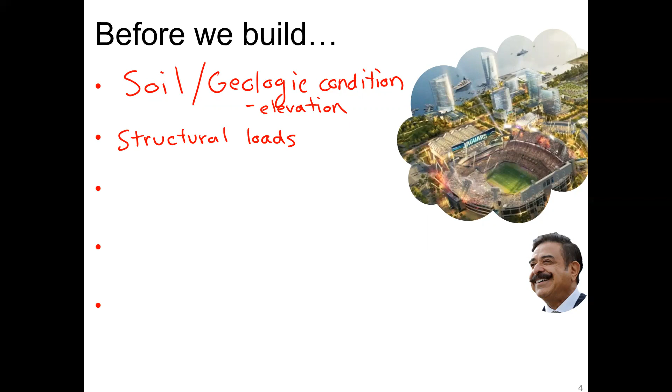Yeah, that's kind of cheating because that's geotech stuff, but yeah, soil and geologic conditions are definitely important. But what else? Elevation—yeah, that's kind of related to geologic conditions, but especially in Florida where we have groundwater table issues and flooding, you need to check the FEMA maps and everything. But also, like our structural engineering friends—structural loads are important. We need to know what type of structure it is and how these external loads are going to be applied and eventually transmitted into the soil or whatever foundation we have.

The serviceability is important too—what exactly is the structure used for? As you guys may have already seen in some of your workplaces, depending on the type of structure, there's a dependency on the amount of money you pour into it as far as design considerations go. If you're designing a nuclear power plant, something meant to be there for a long time producing a lot of energy for society, you usually put much more design effort into it than you would for a warehouse or storage unit. So the serviceability of the structure is an important aspect. Other things, like existing utilities, matter too.

As we were talking about in the CE materials class, something else you would consider is the available contractors and available materials around, the availability of materials or contractors.

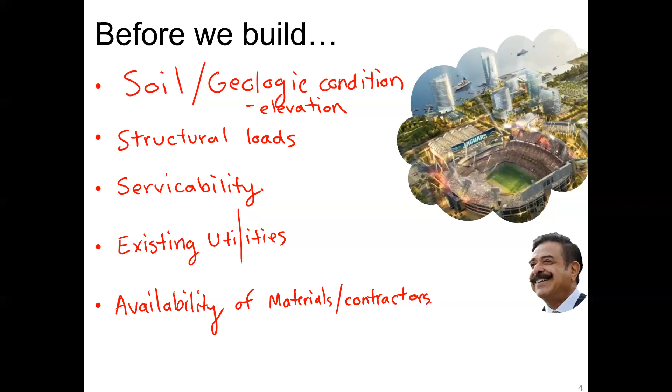I was talking to a former student who's working right now doing a new geotech ground improvement technique. When the contractor mentioned this, I'd never seen anyone do this in Florida. He said the contractor drives 15 hours from South Texas just because we don't have the availability of contractors in this area. That's hard to replicate in the classroom, but when you start working, you'll have to take into account the availability of skills of nearby contractors or even the materials they can use.

So you can probably see there's two or three things we're going to focus on a lot in this class. Of course, the soil and geologic conditions, this being a geotechnical course, we'll focus on this a lot, but also serviceability and existing utilities. These are part of design considerations for geotech, but also the subsurface and site investigation. One role of a geotech we'll see throughout the semester is determining what is underground currently and how we can design what is above ground safely around what is currently underground.

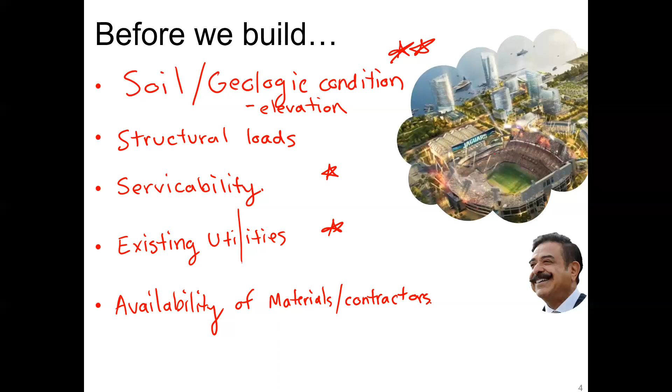We've talked about this previously, but to recap, civil engineers, broadly defined, manage and design infrastructure. Infrastructure is a set of fundamental facilities and systems used to serve a society. Some examples are things we use every day, like utilities, roadways, bridges, transportation, basically all the things we use every day without knowing we use them. One goal of a civil engineer is to design and ensure that it sticks around so we don't complain about it as citizens.

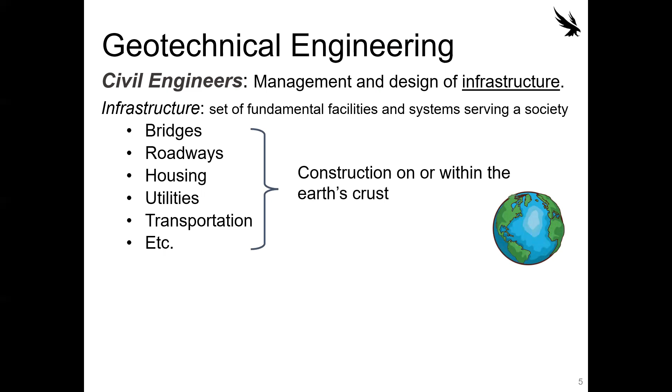Now all these things have something in common: they're all constructed on or within the Earth's crust, which is where us geotechnical engineers come in. We have to find a way to connect all these things constructed above ground and rooted in the soil. We need a science that explains the mechanics of rocks and soils, their response to the loading of external structures, and how they can stay above ground without sinking or failing throughout the lifetime of the project.

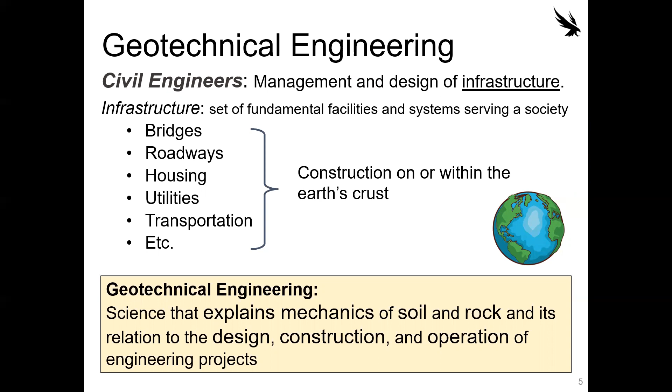Infrastructure decisions, as I talked about in CE materials, are based on two things: safety and economy. We could over-design something, make it as expensive as possible, and it would be safe and stick around for thousands of years. But is that the most economical thing? The Romans over-designed everything, which is why their structures in Rome are still standing, just massive, and they cost a lot of money. Nowadays we don't do that because we don't have unlimited money.

As a geotech, who can think of some structures or infrastructure that a geotechnical engineer would specifically be in charge of or involved in? You can just shout it out.

Subways, yeah, that's really true. Tunnels or subways—unfortunately we don't have that here. Does anyone ride that little metro thing downtown that just goes in a little circle? It goes like 2 miles. I see it sometimes, there's nobody on it. It's our claim to fame for public transportation, really getting there. But yeah, tunnels and subways everywhere else besides Florida and the US in general, we have those issues.

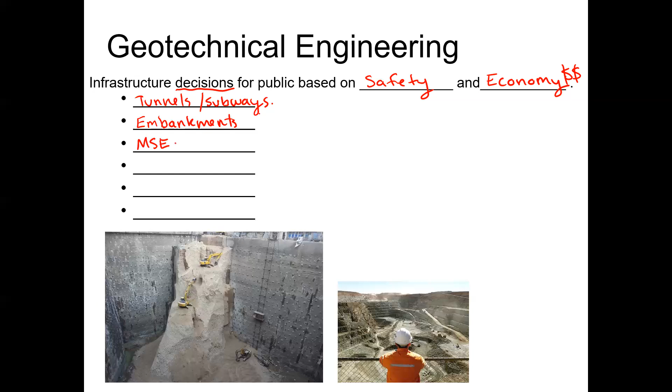Somebody else mentioned the dirt stuff with the bridges we talked about last semester, like embankments and stuff. Yeah, embankments or MSE walls, using soil as a construction material.

Dams, that's a big one, construction material. Other stuff too that we don't really think about: landfills, all the stuff we throw away. The geotechnical engineer needs to ensure the site conditions are conducive to support that trash before we stack it on top, but also that if something happens, we don't get leaking into the aquifer or any groundwater tables we get our water from.

And then of course, the most common thing, foundations. All structures need to first have a solid foundation that the infrastructure or the outside structure can then be constructed on. Some of these high bridges or large skyscrapers need pretty diverse or complex foundations to transmit the loading from the above-ground structure safely into the soil, so that structure doesn't collapse in on itself.

So basically what we're going to be learning about throughout this class is load transfer into soil. You'll see through this whole semester, geotechnical engineers and structural engineers work hand in hand. Not only do structural engineers help us design our foundations, like the concrete and the piles, but we also need to work with them to know what size loading the structure can support and how that's going to be transmitted through the columns and the shell of the structure. For load transfer into soils, if we have a load applied to soil, we need to know how the soil will react.

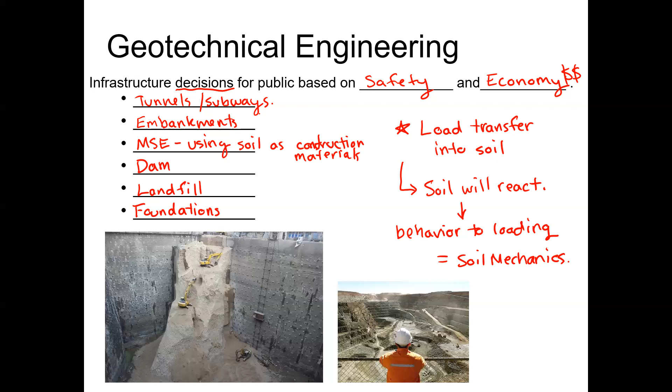This is kind of the root of geotechnical engineering: understanding soil mechanics and understanding first how the site-specific soil will react to the external loads that we apply. The theory of soil mechanics we will barely get into—we're just going to scratch the surface, because soil mechanics as a general genre of engineering is relatively young. We're still understanding how soil will react in different areas on a unified scale. But that's going to be the basis of this class, and then we'll move up into more of the structures a geotechnical engineer would be involved with.

So I want to summarize the role of the geotech into three things. First and foremost, the role would be to investigate. My goal for this whole class is to sell you guys on why geotechnical engineering is the best—so I am a little biased—but geotech is interesting because we get to see the project from start to finish. We first have to investigate the site conditions and understand the specific soil conditions.

We need to assign design parameters—this is where that mechanics comes in. Just like steel has a Young's modulus, that E value, and steel has a sigma Y, that yielding stress, if you remember from last semester, you have all these design parameters that help us mathematically estimate the response of the structure or material. We also have these for soil as well. So understanding the design parameters, that's the first thing.

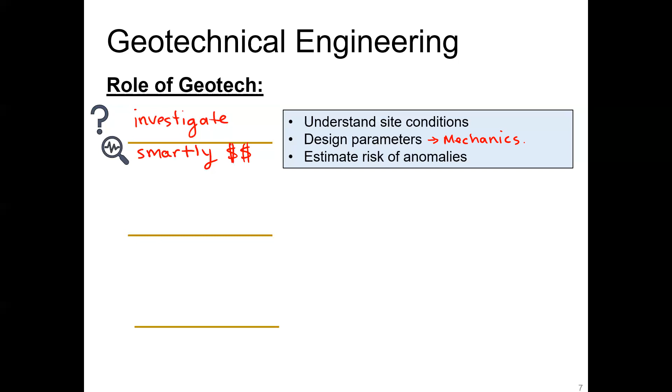Not only do we need to investigate, but we need to investigate smartly—money-wise. As I said before, we can pour as much money into a project as we want; we can know the entire subsurface condition from ground surface down to bedrock for every square inch. But of course that's going to cost a lot of money, and is that worth it as a geotech to pour that much into a project where it may not require it? So doing a smart, effective investigation to understand the site conditions. The next one, of course, is then we have to design.

That says design, and this is where we will work with the structural engineer. So in this class, we aren't going to get too much into the design of foundation types. That's going to be the tech elective that I definitely encourage you guys to take after this. But still, anticipating the most probable soil failure type is going to be key.

Steel, we kind of know if we pull steel, it's going to break in tension, right? But for soil, loading the soil can result in different types of failure mechanisms. So first, understanding which type of failure mechanism is most prevalent at the soil type at your site, and then designing an effective foundation to transfer those structural loads safely through that soil so we don't hit that criteria of failure. And then during the whole process, the construction, we get to hang around during the construction too, which is fun.

So not only do you get to do the site investigation, come into the office and work on the analysis and the design, but then we also get to ensure that the foundation is being installed and constructed correctly. And the big thing with this is because changes will happen. Again, what we're working with here is natural material.

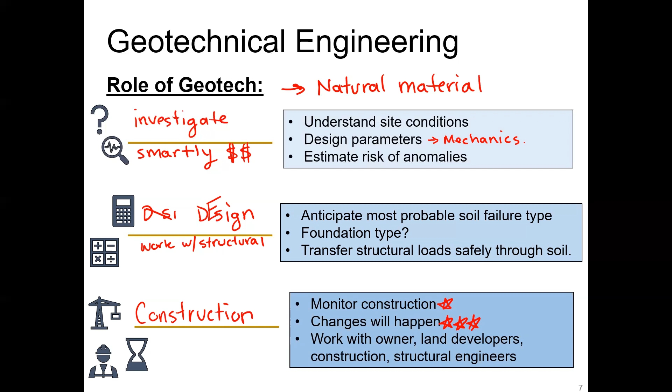Okay, so let's look at a little cartoon here. So let's say you wanted to build a building here. The contractor or owner will hire a geotechnical engineering firm to perform the initial site investigation. So this is if it is just a natural terrain. What we would call here is virgin terrain. We use a lot of weird words in geotech, but this would be virgin terrain where nothing has been constructed.

We can assume everything under the ground is natural. There's no existing man-made structures or anything like that. So basically what a geotechnical engineering firm would do, they bring these trucks out. Maybe you've seen these on the side of highways before, or maybe you've worked with them on a project before.

But these are basically drilling rigs, and there's different types of tests that can be performed. But long story short, we're bringing samples from underground up to the surface, so we can then bring those samples into the lab and do different tests on those samples. And those are the tests that you guys are going to be doing in this class.

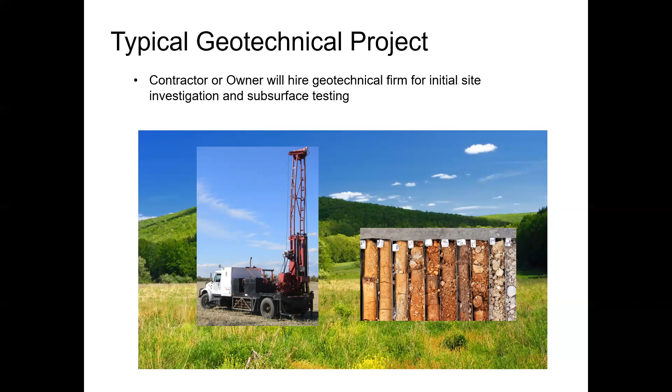So what these do is normally collect samples every 2.5 feet or so. So if a drill rig came in here, we'd poke a hole down, we'd reach a certain depth and have these soil samples with depth. And then we'd be able to identify the different layers. So the geotechnical engineer will then characterize the site and determine these soil layers.

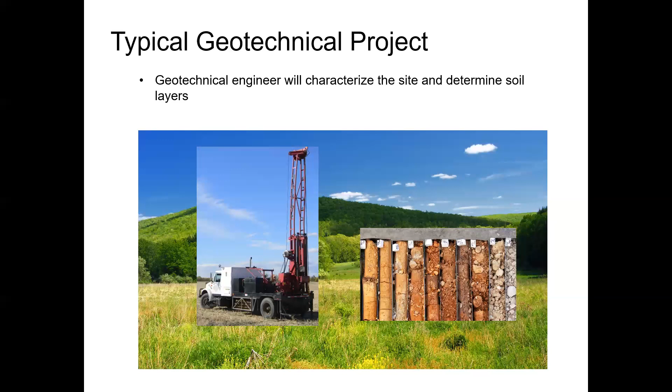Obviously, it's expensive and these tests take time. So to come out here and do a test every 5 feet or so is not going to be economical. So this is where that discernment of how many tests are required comes into play. And that's where the local aspect and understanding the geologic conditions is really important. So generally they would do a few tests per site or so, and then they determine the typical or the characterized site to determine these soil layers.

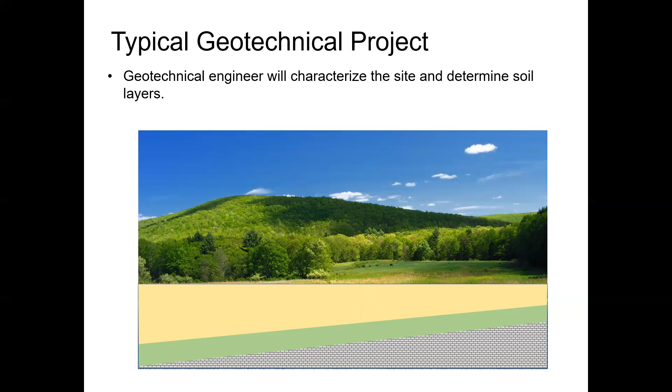So what we'd do then is draw a little profile, and we'd be able to say where the limestone is throughout the site, or where the bedrock, where the different soil layers are underneath our project site.

So that next step then would be to add these strength parameters. So again, thinking back to mechanics of materials, steel has these parameters that help us design against them, right? Like concrete has a compressive strength, that FC value. Again, it has the Young's modulus, the E, the sigma Ys, the sigma Fs. So soil, we need to define characteristics for that, even though they're a little different.

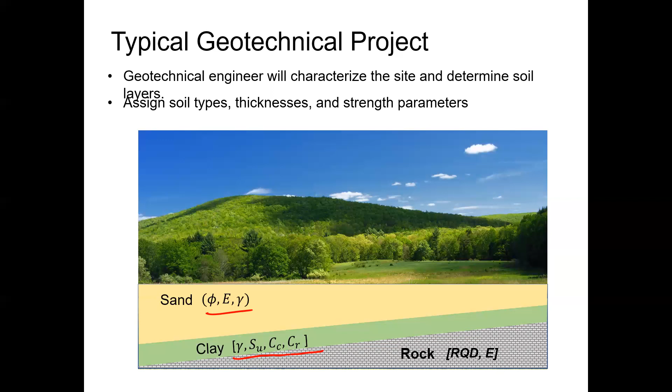So some of these will look like this, and you don't know what these are yet, and that's okay. We'll talk about these throughout the semester. But we need to define these strength parameters, and this is where the lab consideration comes into play too. So we do tests on the samples in the lab. We'll come back and be able to create a profile like this. So then we talk about, get back with the structural engineer and determine what type of foundation, or if there is an excavation that needs to be performed for this.

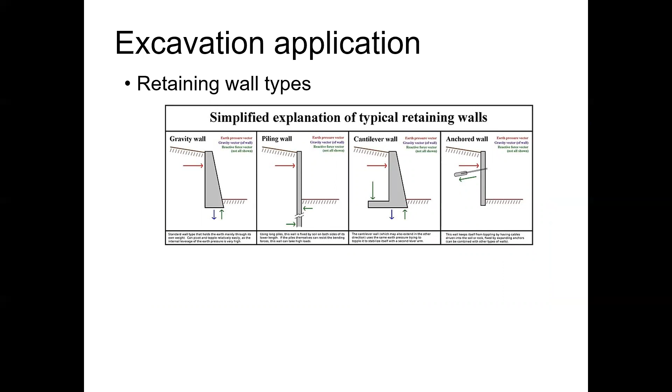So let's say they need a basement and we need to install an excavation for this. There's different types of retaining walls or other geotechnical designs that we would construct and work with. Again, we don't see many of these in Florida, but stuff like this, where we lower the groundwater table and we lower the ground surface elevation so we can get more room for the structure to build our parking garage or whatever they need underground.

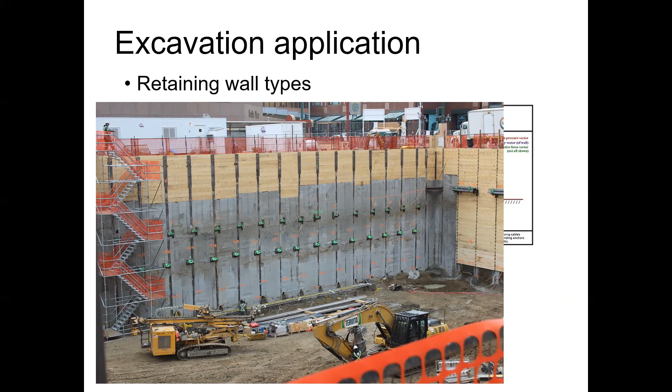Florida doesn't have many of these because of the high groundwater table and poor soil conditions. But if you've ever been in any other city and seen construction, you've probably seen something like this, and this would be a role of the geotech. We have something similar, which we talked about in our materials class, like a retaining wall, or what's called an MSE wall, the mechanically stabilized earth wall.

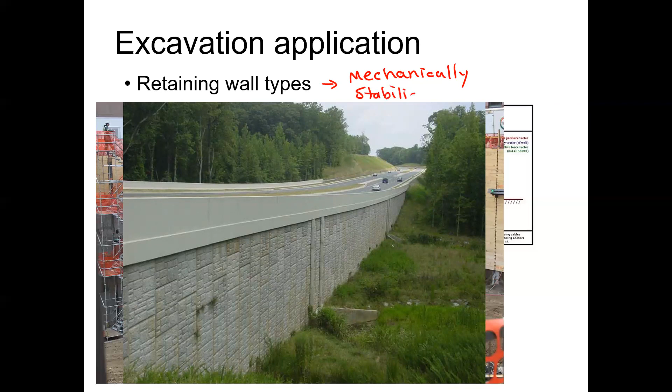Even though it looks like it's concrete right here, these are just little panels. If you were to remove those panels, the structure would still stand up fine. It's just to not freak people out and have them see just soil stacked there. But this is using the mechanical properties of soil as a construction device. So instead of pouring concrete and putting this whole massive thing with steel or concrete, we can use earth. It's basically the same thing as a retaining wall.

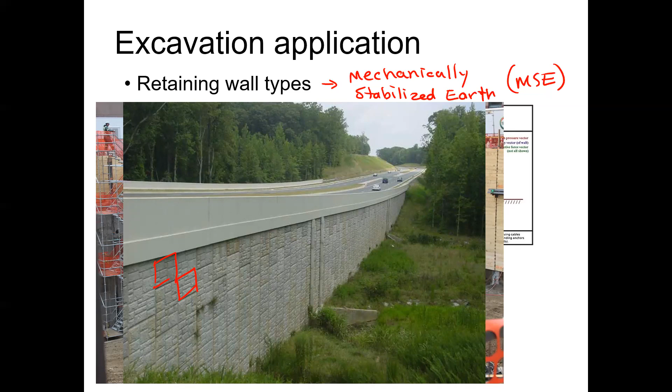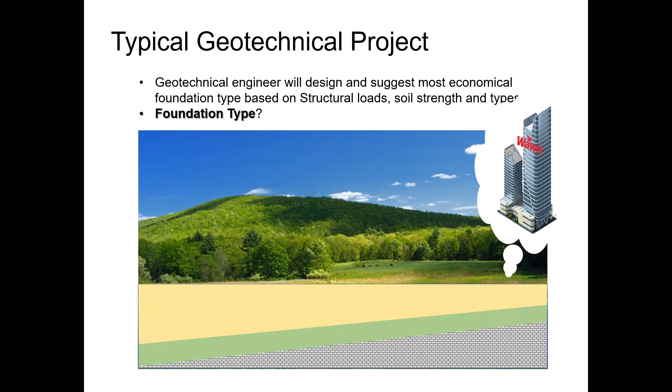So let's say we've already constructed the retaining wall and everything. Now we need to design what type of foundation. Has anyone worked with foundations before? I know you probably have, everyone. But we'll learn throughout the semester there are two main categories of foundations. First, we have our shallow and our spread foundations.

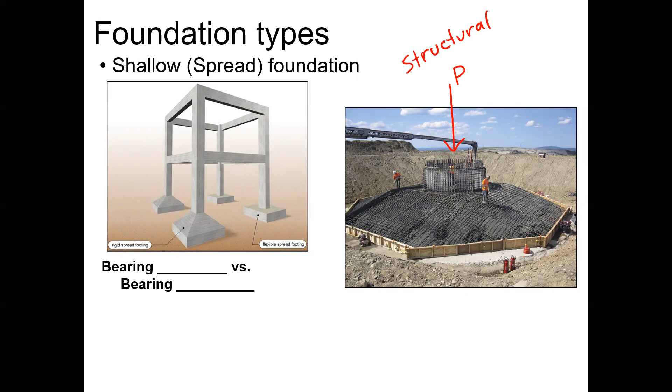Basically what these are doing is taking this structural load and distributing it throughout the soil area. So this would be a footprint, and we would then apply a bearing pressure instead of a single point column load, distributing it across everything. Just like if you took a pen and poked your hand, that pen, since it's a concentrated point, will hurt a lot more than if you put a coaster on your hand and then poked it. You're distributing that load and decreasing the pressure by increasing the surface area.

That pressure, which we'll show as a stress, sigma, is equal to our force divided by our cross-sectional area. So if we increase the cross-sectional area, if we increase that denominator, then we are decreasing our stress. So with these types of structures, we apply a bearing pressure, and the soil will have what we call a bearing capacity.

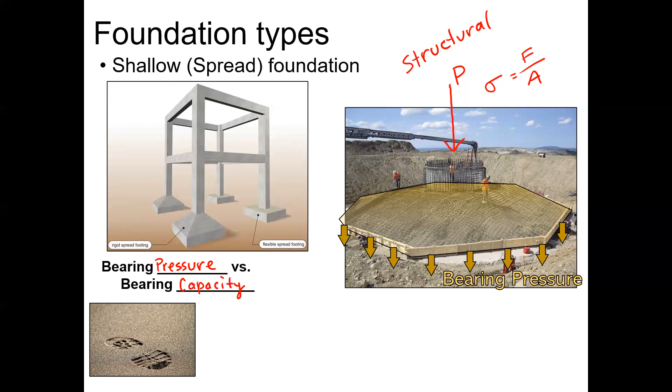Just basic nature, or what you've probably witnessed in your day-to-day life: if you walk on the beach and the soil is compacted, then maybe you'll have a small footprint with little deformation. Some places though, where the soil is really loose, even though you weigh the same and aren't applying any more load, you may sink and the soil may move more. In areas where the soil is really crappy, a person just sinks into the ground. So it's not only a structural consideration of how heavy the loading is, but also a soil consideration. That's why people do that in every place besides Florida.

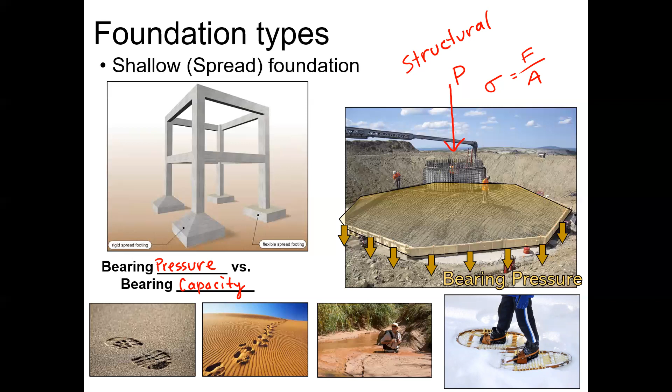You distribute the loading so you don't apply as much bearing pressure, and then you're able to stay on top of the surface. So that's our shallow and our spread foundations. Generally, a lot of structures in Florida, your standard house, your normal average structure, will just use this type of construction and foundation design.

The other one, in areas with really poor soil conditions or extreme loading, we would use piles, or these are called our deep foundations. So piles or drilled shafts. They're also called caissons if you work in other countries. I think it's spelled like this: C-A-I-S-S-O-N-S, caissons.

Basically, instead of applying all that soil pressure at the surface, we're now distributing it vertically. So we use friction along these piles and we transmit the load to a denser, deeper soil layer.

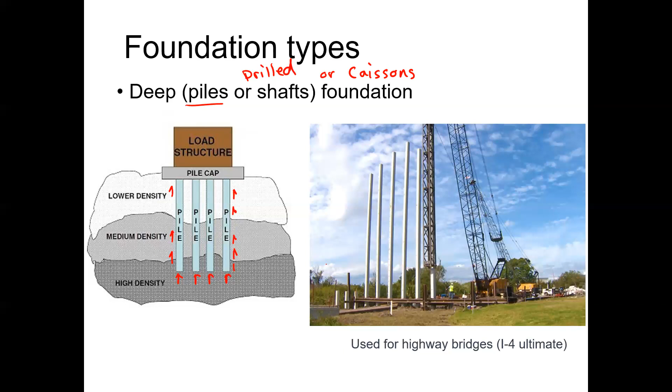If you ever go out on the beaches or out on the Suwannee River, you'll see a bunch of these houses on piles. That's also against flooding, but it's also to distribute that loading from the house to a stronger layer that's not the ground surface, because we don't trust the layer at the ground surface. These are also something you may see driving around, especially over in the Orange Park area where the FCE, the First Coast Expressway, is. They're putting a bunch of piles in like that, and these are the foundations that are getting buried so they can put the bridge on top of it, so that bridge won't settle.

So let's say our little project, the Wawa—you guys don't have Wawas up here, so it's not that big of a deal. But in Orlando there's like 6 new Wawas. We got plenty. I ate there last night. Tell me where they are. I only know of one. Sorry, didn't mean to strike a nerve with the Wawa. I thought you guys were gate people, but I guess not.

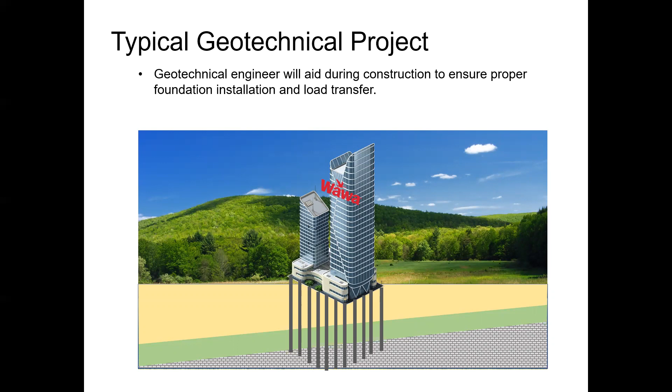All right, so let's say we have this, and they decide to do piles instead. This whole illustration here was in virgin ground, right—this is land, a nice prairie that nobody's constructed in. But 9 times out of 10, you're building in an already industrialized area, so we have to worry about other things: existing tunnels or utilities, other buildings, water or docks, all these things we have to consider for how the loading from this structure will affect existing loads.

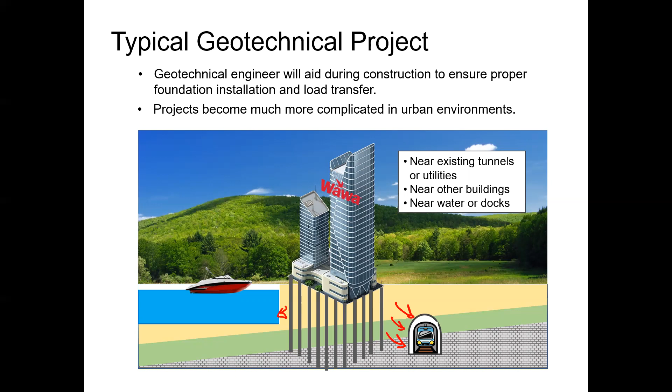If you've ever gone to New York City or Chicago, the 2 old cities we have in the US, you'll notice it's built in layers. Some of these new structures are being constructed over layers of existing structures, and some of those structures are so old they're not even documented. So the type of subsurface investigation is really, really important, so we can ensure that as we're drilling one of these piles down, we don't accidentally poke an existing subway or gas line or something that would cause much more damage underground.

And the big one in Florida is our sinkholes. We have a certain type of limestone bedrock that's conducive to internal erosion. If we accidentally miss one of these little pockets of subsurface loose soil and put a building on top of it, you've probably seen the articles and news people freak out about it. But this is all because the geotechnical engineer or geologist doing the work missed a section of vulnerable soil and constructed a building over something they didn't know was there.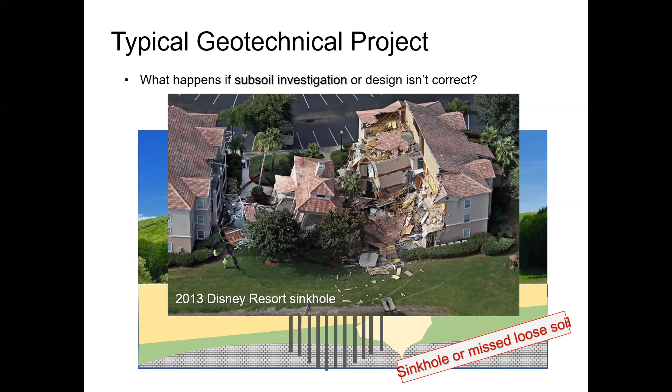This one was the Disney Resort in 2013 in Orlando, and luckily this one didn't have any casualties. They were able to notice the structure creaking and evacuate the building before it collapsed.

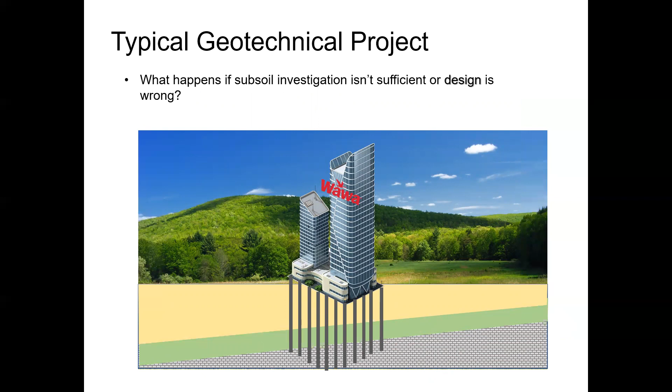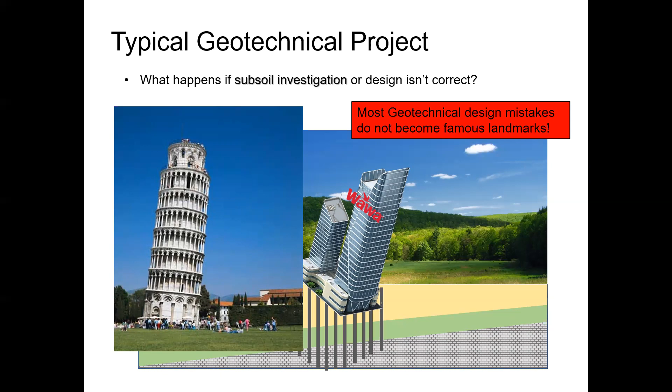So don't follow this mold if you're an engineer. Try to design something that won't tilt because you'll probably get in trouble. But let's look over some of the other geotechnical design failures.

I like showing these because geotechnical engineering is a very important discipline of civil, but it doesn't get the most credit because you don't see the work they do. All the work is buried, it's all underground, and then the fancy structural engineers come in and take all the credit. Not bitter at all, but still, the failures are placed on us, and we have to ensure we're doing a good enough job, because that's probably the most important part of the structure, the foundation. So you could have failures like this.

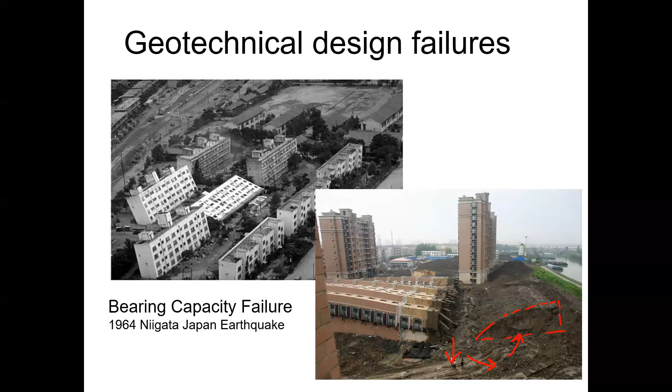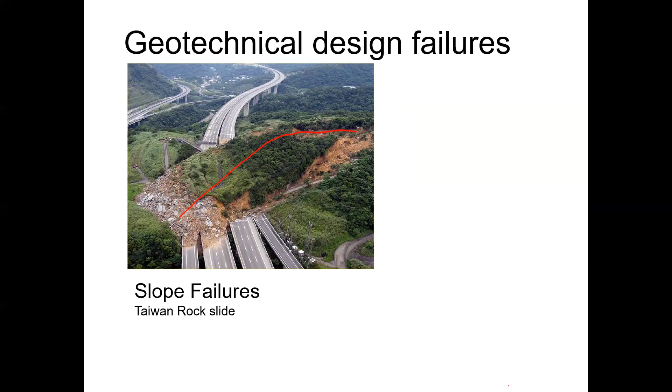Other stuff like this is a hill, we don't have these in Florida, but this is where the elevation goes up. If we don't design the slope correctly, it could fall over and block a major I-4 road, which would not be good. We do different things to combat this. There are other disciplines, similar to retaining structures, where we put these nails in to hold back the soil so we can cut it and it won't fall over on the road like this. This one is in Taiwan, you can look up more details of that too.

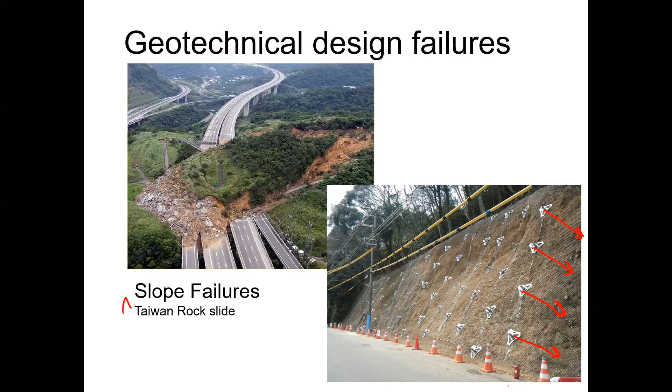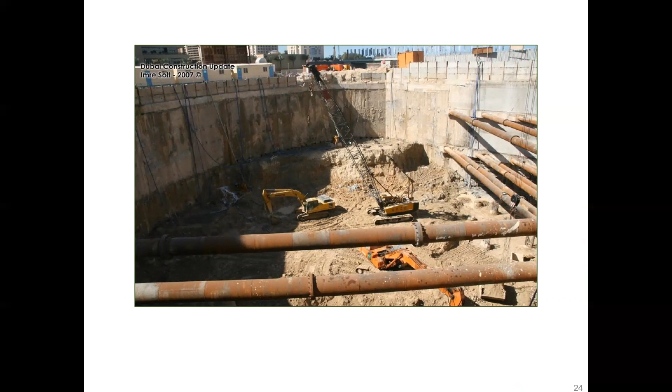This is a kind of sketchy example, this is in Dubai, and we'll talk about some of the material properties. The permeability of the soil is going to be really important. Permeability, long story short, is the ability of the water to flow through it. So if water can flow through that soil too quickly, we can have intrusion of water into our excavation like this. Although this excavation looks good here, if you zoom in right there, you can see there's one area where we have water actually flowing through. So this excavation, actually, this is all water right here.

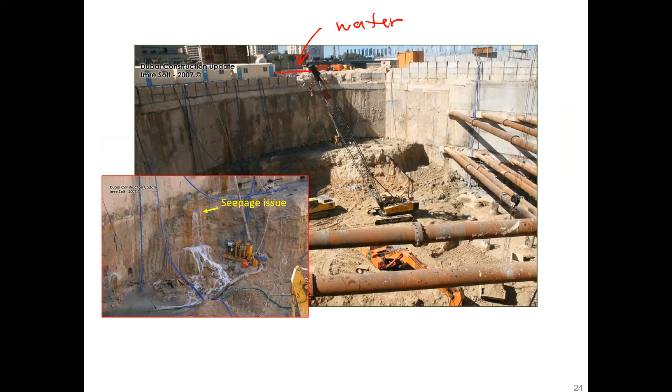The problem with water is when it starts flowing through, it increases the erosion, and it's a progressive thing. Eventually this whole thing flooded, and now instead of an excavation, you get a nice little lake with the crane sticking out on top. So one little detail of misdesigning the permeability of a structure or the soil, or just the construction aspect, could have extreme consequences and completely ruin a project, like we see here.

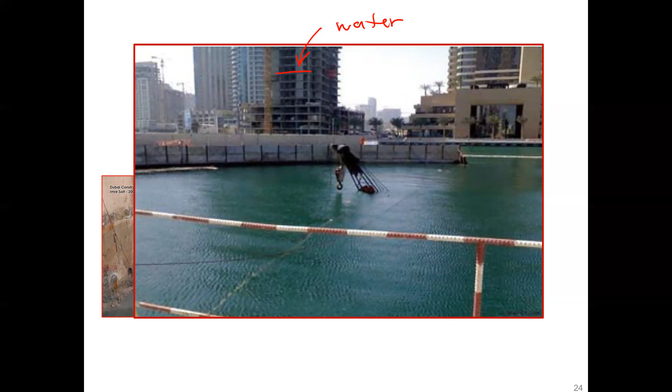Other simple little things - this bridge, I think it's in Wisconsin, you can have a perfectly designed bridge, everything works structurally, but you can see here one structural column settled more than the other ones. Even if it's only settled a couple inches or half a foot or so, that could have dire consequences on the serviceability of the bridge. So everything else is fine, the whole bridge works, but this could have been caught with a geotech investigation where it settled down.

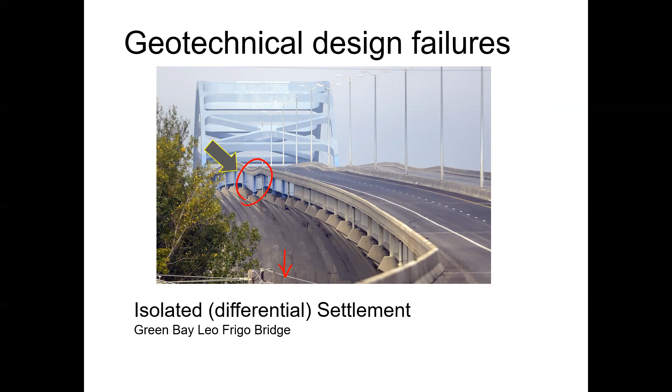How are they going to deal with that? What they would end up doing is jack up a foundation - a foundation is sitting on soil, you can come and put other piles near it, and then with these really heavy jacks, basically you jack the whole thing up in stages. So it's not the worst, it's not as bad as the other one, the excavation, but still this is added costs, and it could have been easily avoided if they had just done an investigation in that spot and maybe noticed a weak soil or some type of anomaly there.

So I wanted to end by showing some of these videos. I don't know if it's going to load. Ooh, cool.

The big area in geotech I'll be focusing on a lot this semester is site investigation and problematic soils. The most important thing is understanding the mechanics of the soil at your project site. A unique geologic phenomenon up in Norway, if anybody's seen this stuff, is what's called sensitive or quick clay. It's this clay that's very strong, but as soon as any failure occurs, everything just turns to mush. It can be very misleading - it looks like a strong clay, but if anything happens, like triggering, the whole thing will collapse.

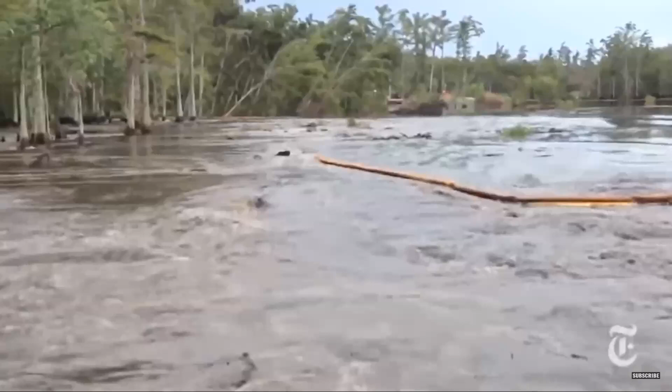You can see this is pretty gnarly. And again, with these issues, these are progressive failures. So one exploratory boring in the wrong spot, just a hole 12 inches in diameter, can then cause these massive issues where everything becomes progressive. They ended up having to evacuate a whole town for this.

It depends on the type of project, like the sensitivity. If you're in an area where this could potentially happen, then you may need to investigate further. Of course this is very specific - there's not salt domes or salt mines everywhere. But in this area, they knew this could have potentially happened, so maybe they should have looked more into it.

Do they know what's going on right now? They hit a cave 1,000 feet down. Basically when they hit it, they realized it and were like, oh crap. I think this happened in 2013 or something. This is still ongoing, and I don't know if it's stabilized completely yet, but you can go on Google Earth and see this lake just growing and growing. The town ends up being evacuated, and it's kind of a bummer because these are all just good old country folk getting knocked off their land.

Okay, let's see what else there was - there was one other one I wanted to share.

Yeah, because the mine isn't filled with water, so it's so deep that the water and all that soil is filling that cavern. Eventually that cavern is going to fill and then it'll stabilize.

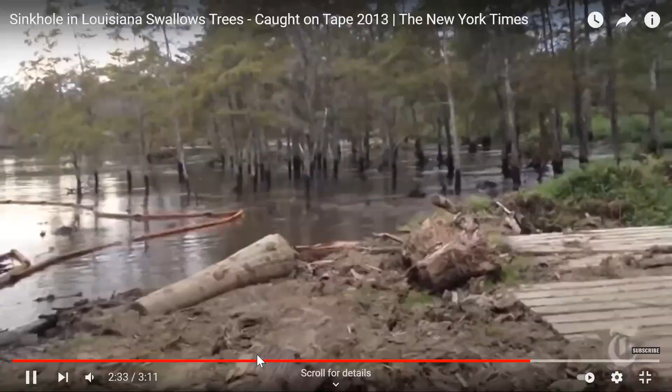Oh, this one is actually - hold on. Another issue that we don't have too much here in Florida, thankfully, but let's see. Right, shaky hands, dude. Let's see if this will work.

This is sand liquefaction. This is an interesting geotechnical phenomenon in earthquake prone areas. This one was in Christchurch, New Zealand.

This is so funny. First of all, I just want to pause it - I just think that's the sketchiest thing ever. Still got to get to work or whatever, but just pushing her child up.

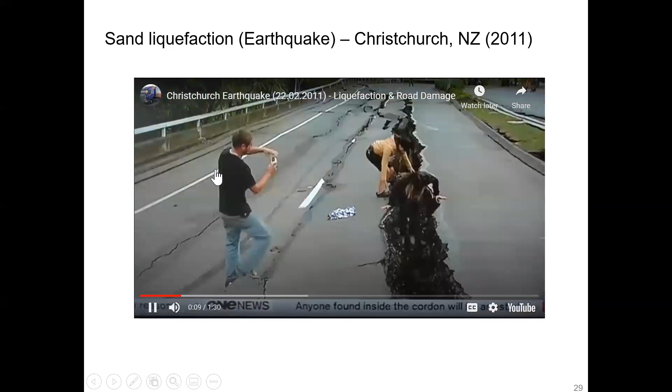This is where the soil, when it's under an earthquake, will act like water, and whenever it stops, it will freeze everything. So here, that's dry soil that those cars are trapped in, and they have to dig out their cars. During these high earthquake areas, this soil will liquefy, and then whenever it stops, it traps everything.

So again, this is a natural hazard - something that is not the geotechnical engineer's fault. But they still could have done a better job learning how to densify the soil or remove the soil that could potentially liquefy, so you don't have issues like this. Again, very diverse discipline of engineering where you have all these natural geohazards. Not only do we have normal variation in soil conditions, but we have these extreme examples, and a lot of area for research - like liquefiable soils, and understanding quick conditions like the Norwegian clays. It's still a discipline that is growing a lot over time.

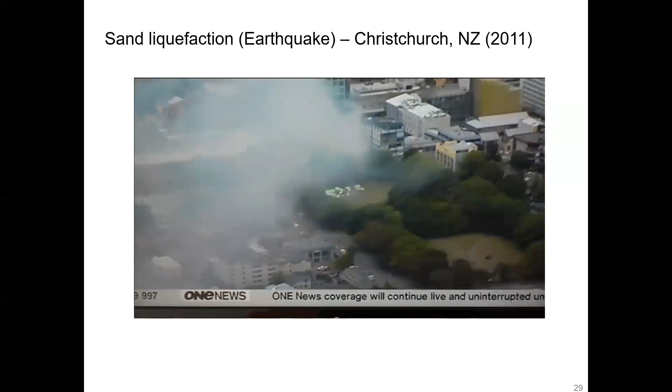All right, how do I get out of here? Okay, sweet. Let me go back to this where I can actually see it.

All that to say, in my opinion - being biased, being a geotechnical engineer - it's one of the most rewarding disciplines within civil engineering, because everything you're doing is needed for all types of structures. As you start working in land development, wastewater, and anything, everybody will have to go through a geotechnical engineer to understand the site conditions.

It's also a relatively young science. In 1943, a mechanical engineer from Austria said, let's understand the mechanics of soil in a little bit more detail. He was actually the first geotechnical engineer, even though he was a mechanical engineer, but we'll forget about that. Not until 1943 - so it's still a very relatively young discipline of engineering, and there's still a lot of development and area that we can improve.

There's a lot behind the scenes of some of the largest structures and landmarks, so it's kind of cool to see that. There's this quote, I think by this same guy who founded the discipline: 'There's no glory in foundations because most of the work is buried.' So if you like knowing the behind the scenes stuff of structures that the rest of the public doesn't see - like conspiracies and stuff - then this is your area of discipline in geotech.